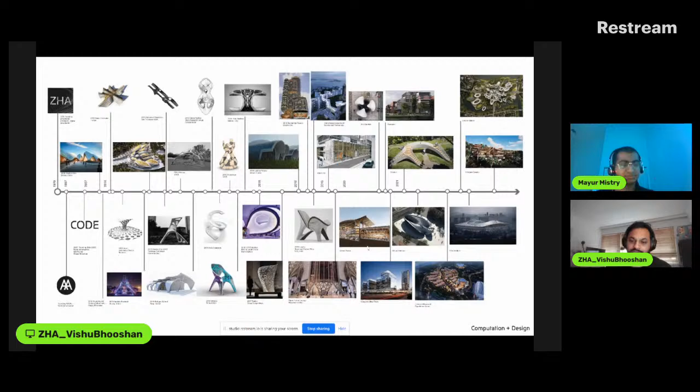Also Patrick brings in quite a few of these interesting pilot projects which kick off our investigations in certain fields, like when we got into high resolution 3D printing with Stratasys. Now Shajay does similar things for the team as well, bringing in these kinds of collaborative projects.

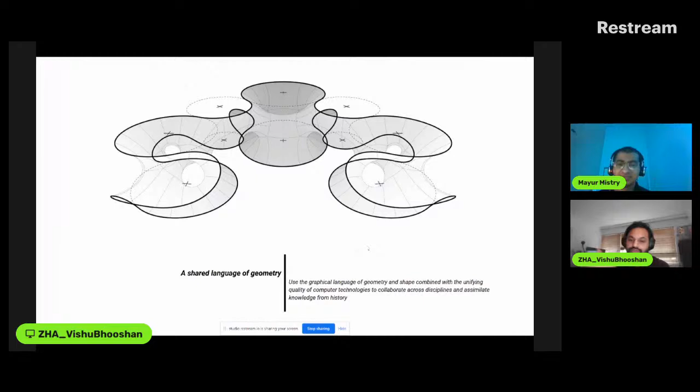Our research, as you might know, is also based on geometry. That's why our libraries are developed on geometries, because they are the shared language, and also a language for collaboration with our collaborators.

Coming to the coding part, most of the members in the team code. We favor first principles to write our own code to understand the algorithms better, and it also helps us integrate it into the design pipeline better because we understand what's happening, what the algorithm is actually doing. This is where we need to look up papers, understand them - if there is no computational equivalent, we understand through papers and try to implement our own.

But now there are a lot of platforms out there which also give you the code, so it's easier to see and implement on top of it or integrate it into our workflows.

As a group, we are interested in coding for design. So all of these tools or stack are meant to augment design intelligence - to aid design, give as much information as possible at an early stage about structure, about fabrication, or any other performance criteria we want to attach.

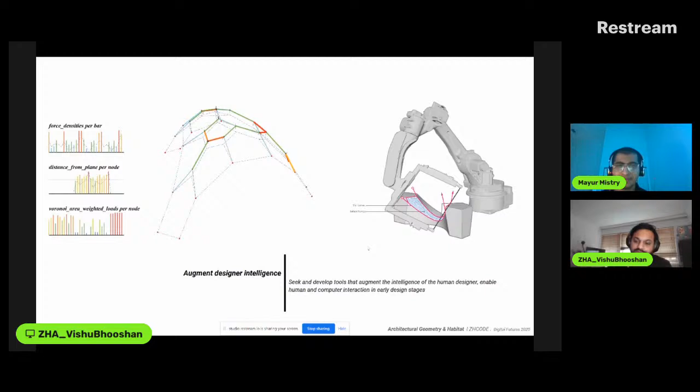As a stack, on one hand we need to develop the core stack, which we currently develop in C++ framework, and then have plugins into all the platforms the office uses - predominantly Autodesk Maya and Rhino. More so now with machine learning, we have to integrate with Python, and then Revit through Rhino Inside. So that's the core stack.

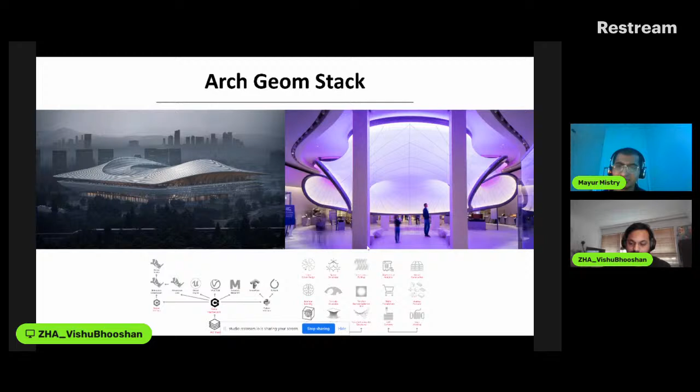We keep trying to update our framework, but the focus of the core stack is split into two aspects - content creation and content delivery - corresponding to the stages of the project. On the left, focusing more on early stage design, and on the right, focusing on later stages where you have detailed design, where you need to rationalize geometry or get in costing.

So we have a role depending on the project. Some projects we are involved at a very early stage, so we need tools there. In some projects we are involved at a very later stage, so then we need tools corresponding to that.

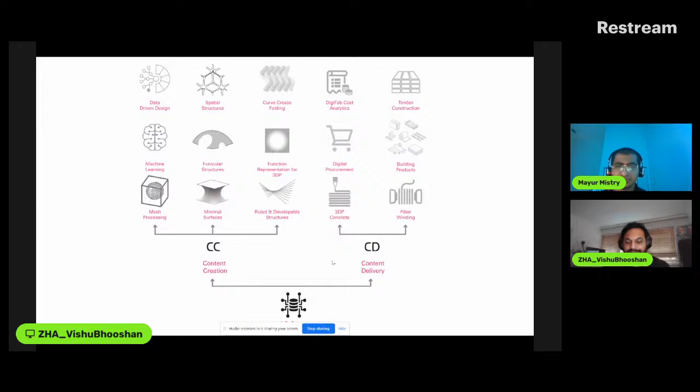Yeah, that's the current kind of stack we have, which is plugging into the different softwares through plugins. It's kind of getting interesting when we are trying to connect to all of these softwares.

As I said, we learn from our contemporaries and from history as well. This is not an exhaustive list, but we look at a lot of computational tech related things at ETH Zurich, looking at the Interactive Geometry Lab there. They have this library called libigl.

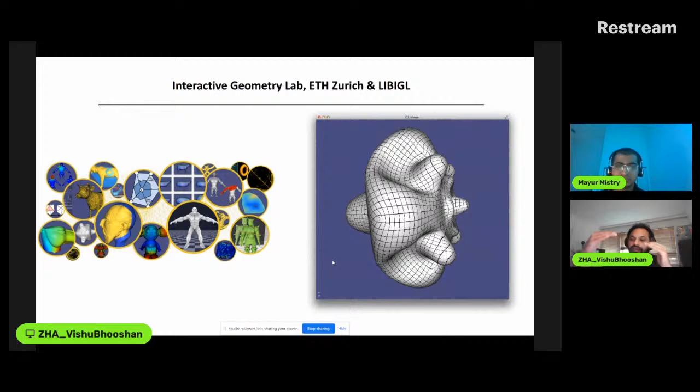libigl is kind of a header-only paradigm, based in C++, and we aligned our framework to be similar in thought process, that it is header-only, so you don't need to build dependencies. That was one of the reasons. They also have a geometrical viewer which is independent of the software, so you can do quick sandbox testing to check if the algorithm works, and once you're happy with it, you can plug it into all the softwares we use.

Also coming to the AEC side, looking at the Block Research Group and their framework called COMPAS, which is based on Python but has a similar idea. They can integrate into different workflows, but they also have a viewer where they do sandbox testing and then develop on top of it.

Other ones we look at are from NVIDIA, called GPU Gems. We look at algorithms there related to geometry processing and occlusion, lighting, and how to use the GPU. This is not an exhaustive list, I just put in a few to get an idea.

On the framework side, this is kind of the current moment. We have a core framework developed inside by a few people at Code, and then an API is developed on top. The core is developed by only a few people so it can accommodate changes, but not many people contribute there. The code developer part is where you need the API—people who know a bit of coding can start using the API to make function calls and create sandbox applications to test the algorithm.

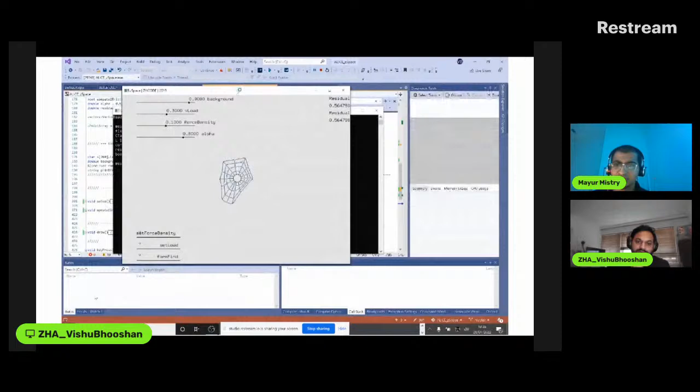Yeah, this is our framework. The documentation is still quite early, so we're still developing that—this is the first version of it. Drawing from the knowledge of all the examples I cited, we developed our own sketch format, a sandbox environment similar to Processing in that sense. You have setup, draw, and update main methods where you call methods from our framework, then press play and check if the code actually works, using a custom viewer based on OpenGL.

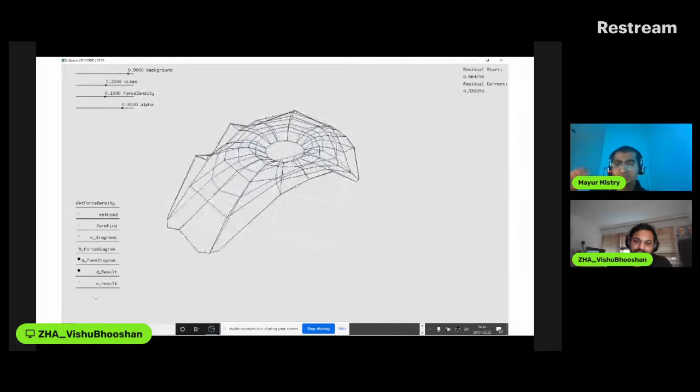Once we're happy with it, it becomes a plugin. This one is currently looking at, I think, some kind of structural systems, looking at form finding using best fit—so given any input geometry, it finds the nearest compression shape. That's the kind of algorithm which is running.

Yeah. That's amazing.

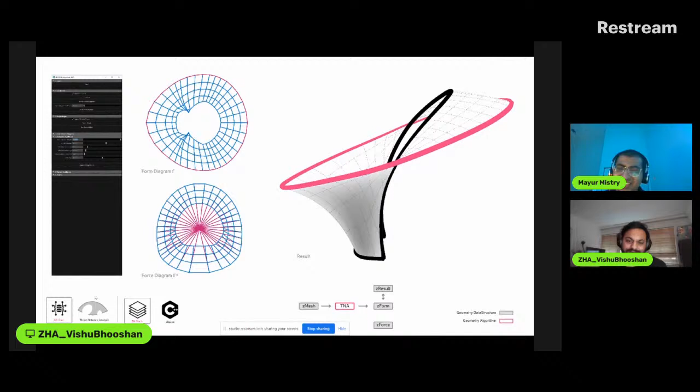There are more things, but if you want to stop and discuss a bit more in detail, we can go over any specific aspect.

I think the tech stack diagram was quite interesting, and the framework you have developed makes a very logical approach based on the different user categories you have in the company, and what's the easiest onboarding experience to integrate these tools for them. That's incredible.

My question is, for example, if someone wants to create a similar framework, what's your piece of advice on how to get started for the intent and goals they have? Sometimes it's challenging to have funding for research at this scale, so how do you take those baby steps to develop something like this?

Yeah, so all of this didn't just happen, it built over a period of time. Initially all of this code was not structured, it was just written. The specific code features or classes were written based on project applications, because we were embedded in projects. So if the project needed form finding, we had to write our form finding tools during that project, and then it becomes part of it.

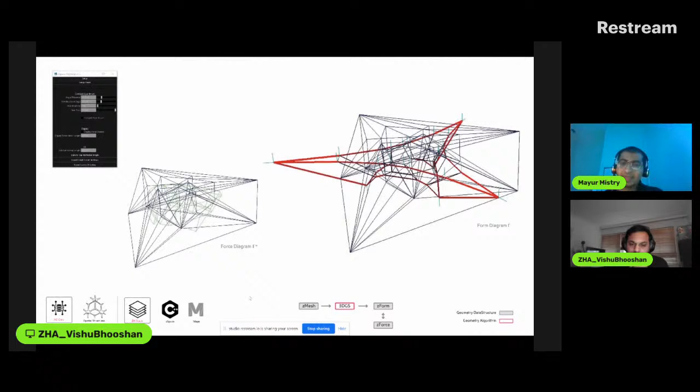Let me see if I can find the correct image. We have an environment and sustainability team developing tools and workflows related to that, and we work with them to develop this. That's why I was also talking about GPU computing—we developed a solar tool, kind of similar to Ladybug, but more real time.

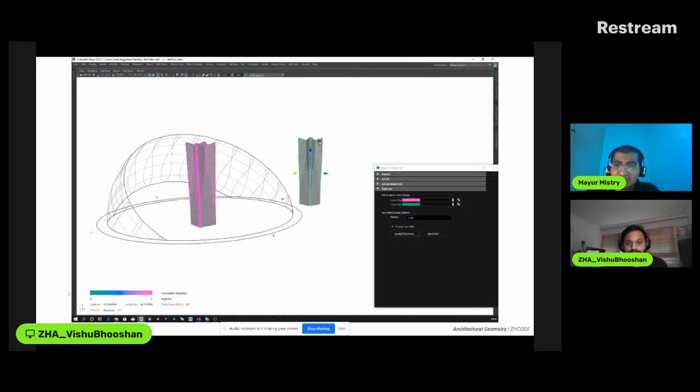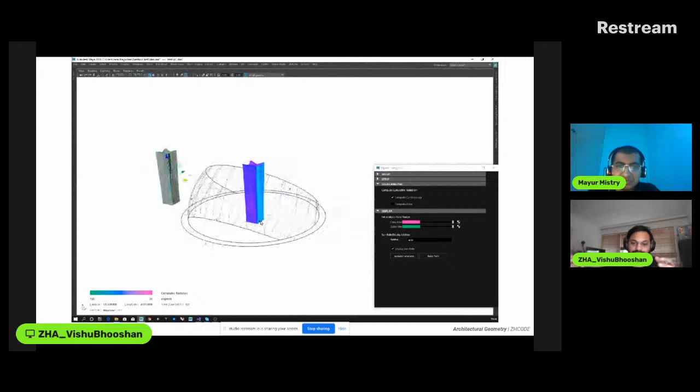It's using GPU to compute while you design—the input design is on the right, and for this kind of solar analysis you need to subdivide it into a lot of faces, otherwise the results aren't accurate. Using GPU you can compute almost 50,000 faces in parallel, so that's why we developed this. It's now in the pipeline, developing the Maya Solar tool.

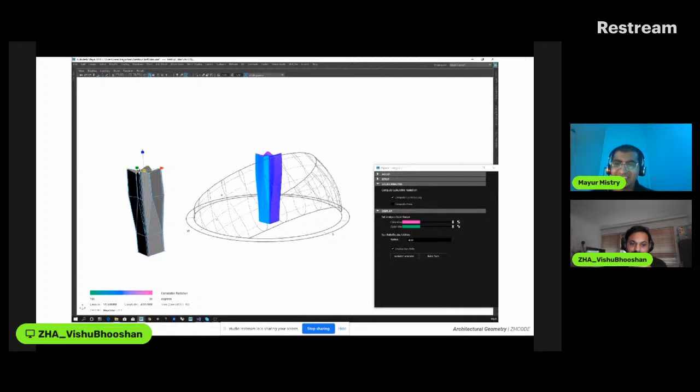It's kind of integrated into the design workflow, so using the interface as you are modeling, you have an understanding of the solar radiation and those analyses almost in real time. So you can see that as you change the geometry, you're getting visual feedback on the right.

This is incredible, I love it. For playfulness during the design phase, the faster inference you get in real time encourages more experimental and explorative work. So this is amazing.

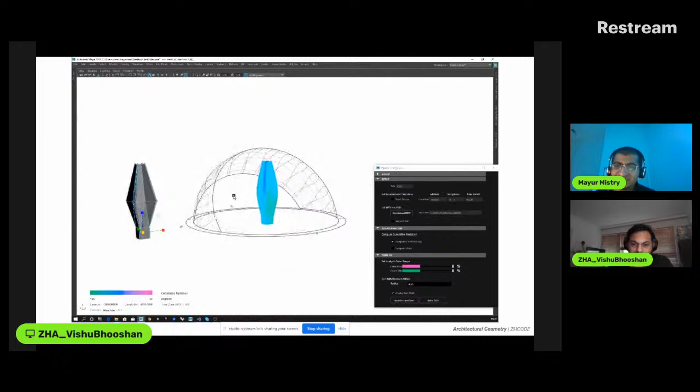Yeah, it's still in early stages of development, but we can already perceive its application. It's speeding up, let's say, one iteration. If you were to just do it through the CPU, 10,000 faces would take at least 1.5 to 2.5 minutes after setup to run the simulation. But in this case, you're almost getting like 12 milliseconds.

So it's real time. If I had to decode this development, currently we are inferencing through a Maya plugin. The core framework people have developed takes an input geometry and talks to the GPU for performance analysis computation, and during that calling there's a formula to take the sun angle and do the compute in parallel. So how did you engineer the GPU part? I think that's quite interesting.

Yeah, the GPU work uses CUDA, NVIDIA CUDA. That's what we use, and that's why I was giving references to the NVIDIA GPU Gems. It's a very good platform to see what people have done, how to use CUDA and GPU for computing, and that's where we learned, or I specifically learned how to code for GPU.

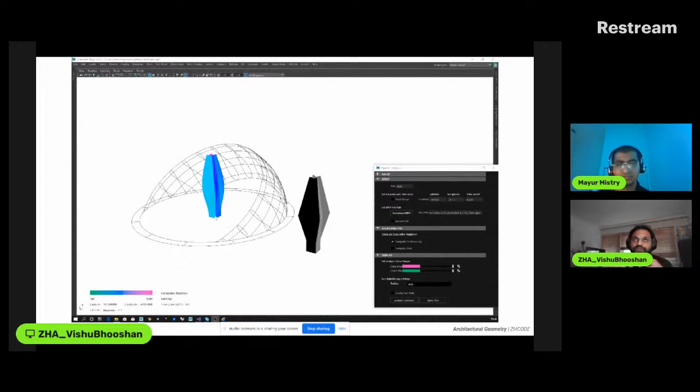So the basic structure is that for each face you are computing, you want to compute the sun angle for each face of the mesh. You have to generate the data such that for each face you have the required sun angle, and you can analyze this for all year long - 365 days, multiplied by, let's say, 8 hours of sun vectors. So that's around, I think, 50 million calculations total, if I remember right, which happens at runtime on the GPU.

So the problem itself is very GPU friendly because you are computing per face of a building or per face of a mesh, which is very GPU friendly. You can parallelize it - you need problems which can be parallelized, and this is one problem which can be.

I see. Just to pick your brain on that - if there are two buildings in parallel and the shadow of the first building is dependent on the sunlight of the other, what if there is a dependency between those two? It's like non-linear, yeah. So that's that one - yes, as you can see now, it's working on an individual one, but...

That is where you can also compute the occlusion in GPU. So the example I gave on the NVIDIA paper was actually that occlusion one - the car was getting occluded. So occlusion is also a GPU problem. You can get real-time occlusion data, so if these are two buildings, the occlusion of this casting a shadow on that is also GPU related. It can be put into the GPU, or it can be split such that you can compute it real time for each face, depending on if it's getting a shadow based on its surrounding.

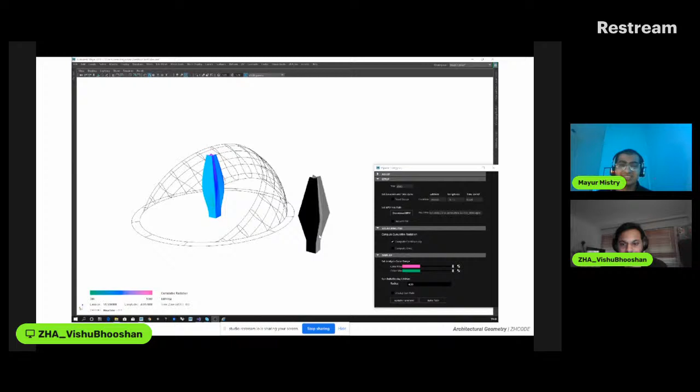Can you walk us through a project life cycle for platform design? I think that's very different—okay, sorry, I think you have the whole presentation, so we can continue for the rest of the presentation.

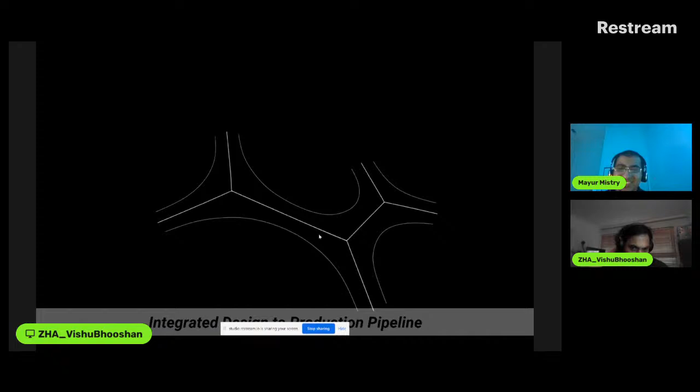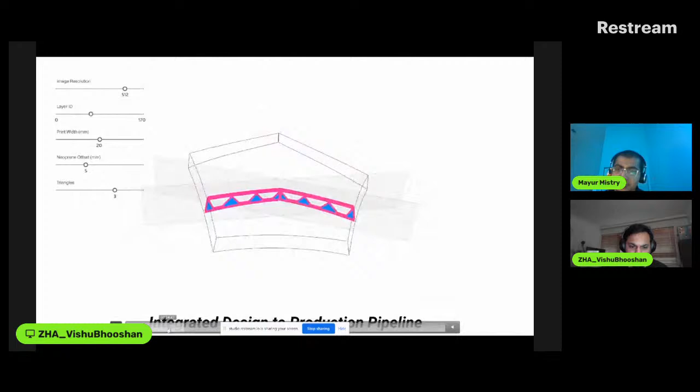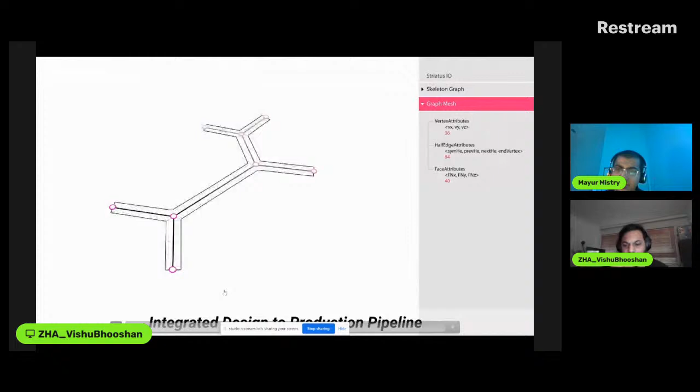So the stack is kind of useful. For any project, as I was saying, there are these kind of pilot projects. Oh, I think I have the wrong video—okay, I think this one. I don't know if I have the correct video here. This kind of integrated pipelines where we're trying to combine things.

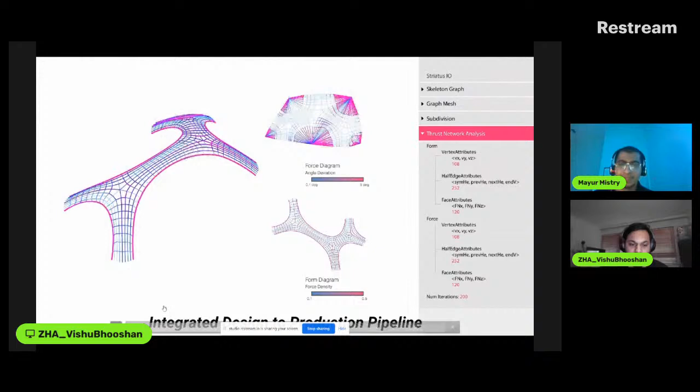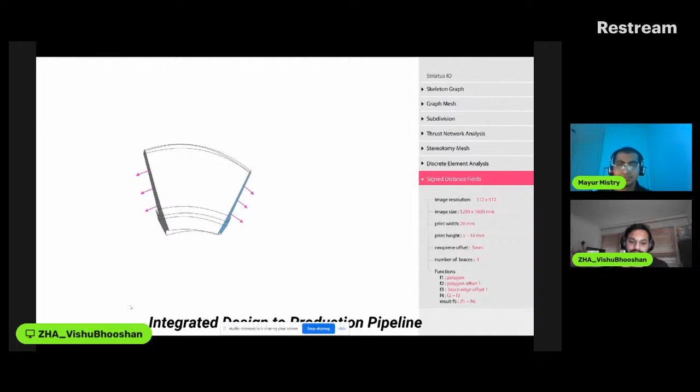This framework allows for collaboration between multiple parties as well. In this case, this was a collaboration with the Block Research Group and Incremental 3D, made possible by Holcim. But the workflow is kind of hybrid here—we were the design team, then it goes into structural analysis with Block Research Group, and then it comes back to us to develop the print paths, then it goes again to the printing aspects. The format here we had to come up with, because all of us have our own frameworks, it was easy to have a custom transfer of geometry, where we had to capture certain attributes.

We had a custom JSON format which sent the right information from the design side to structural analysis. They would do the analysis and send us back a similar JSON, but with added attributes saying this geometry structurally has to be XYZ, and this topology works under rigid body physics or rigid body modeling. Then we use those forces to inform the signed distance field based contouring of the geometry to generate the print paths. Once the print path is done, it sends to the Incremental 3D platform where they read that same JSON now with print information and start printing on their end. Because of these custom platforms, with the whole AEC industry investing in that, it's very easy to add custom attributes, which is very useful when it comes to digital fabrication and digital structural analysis.

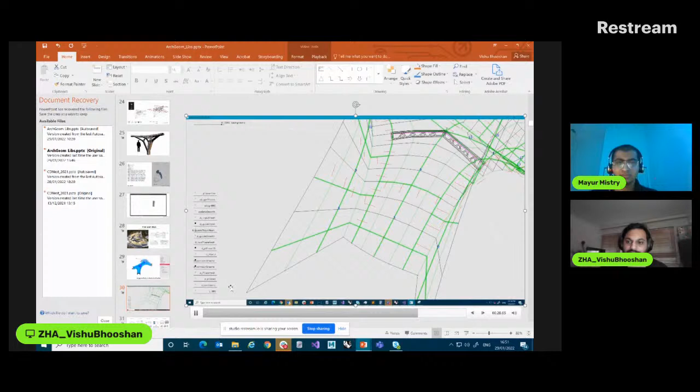At the same time, all of these are initially tested in sandbox environments. This, if the video works, is looking at generating one of the versions of these print paths or print planes for one of the blocks in the Striatus project. Again, this is a sandbox environment where we're testing the code to see if it works. If it works, then it becomes part of the pipeline and goes to Maya or Rhino.

These kind of collaborative projects are where the code generally gets developed. We've done quite a few of these over the last 10, 12 years, and each one gives feedback into structure or fabrication related things—looking at curve crease folding with robots, or printing on a formwork, hot wire cutting. When we work on these, we develop the corresponding tool, which then gets back into the framework.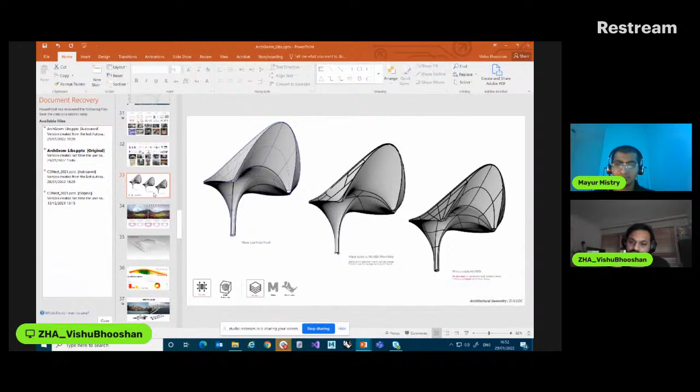Going on to the projects, we also do investigations since we have to work on and deliver projects. In this case, the tools which have been developed can help us rationalize a roof, going from the competition design on the left to the pre-schematic design on the right. It also allows us to negotiate with the structural engineer, saying that because of our experience and tools, there are other topologies which are feasible, and then we negotiate back and forth and settle on a design.

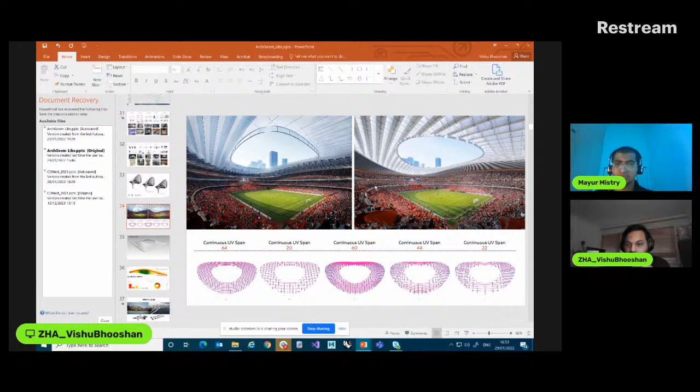You can see there was a truss ring in the middle at the competition stage, which was removed in later stages in collaboration with the engineer.

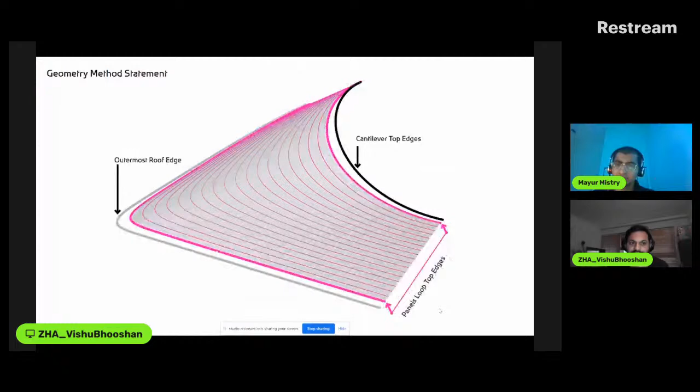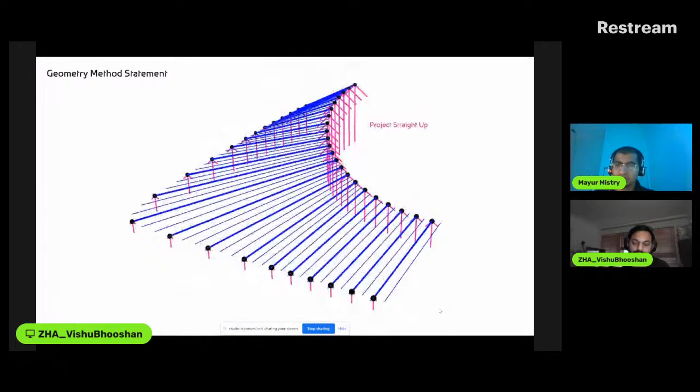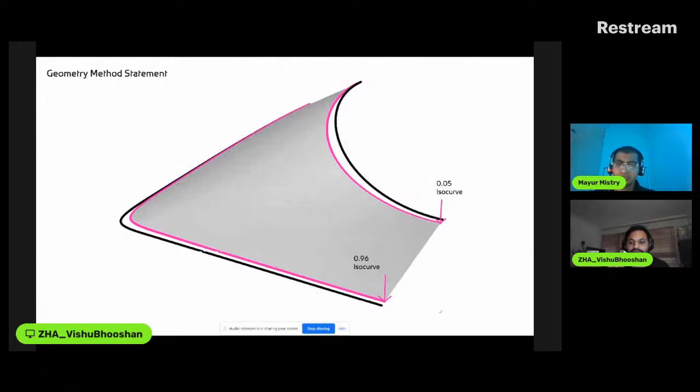At later stages, we have to create a geometric method statement, which I think most companies would also be doing, showing how to create this geometry in a step-by-step manner. Be it roof, facade, or paneling, all these geometries need a step-by-step method so the fabricator can recreate the same geometry without high deviation. So the transfer here is not the actual geometry, but the method of saying how you produce any given geometry.

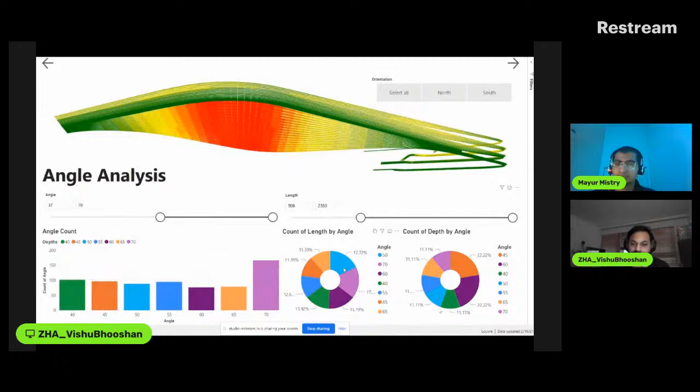We set up tools like this Power BI interface to understand the average length of elements, and whether we can cluster them into bigger or smaller clusters to find an optimum, in collaboration with the fabricator. But this comes at a much later stage, like the DD stage.

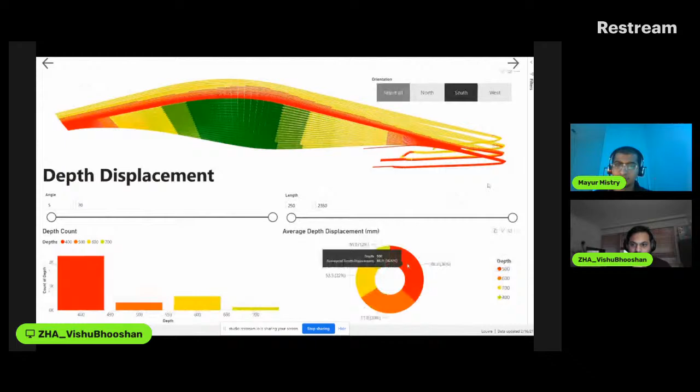I think that's the kind of different tools we use in different stages of the project. Is there anything related to the projects you wanted to discuss specifically?

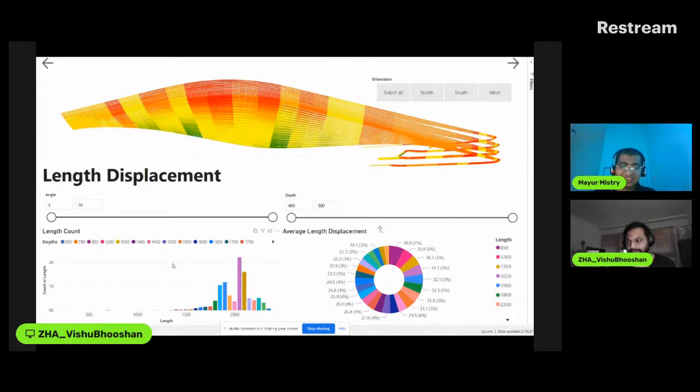No, I think you gave a really good explanation, and I really like the geometry method statement because it gives a very structured approach to the development implementation. Yeah, that's amazing.

It's the same approach. In this case, I just put the roof, but there are similar things for other parts. I don't have it in this one, but you can understand. Let me see if I have it on the other side.

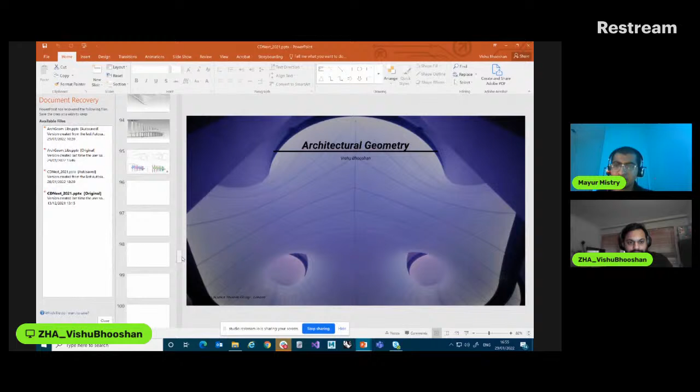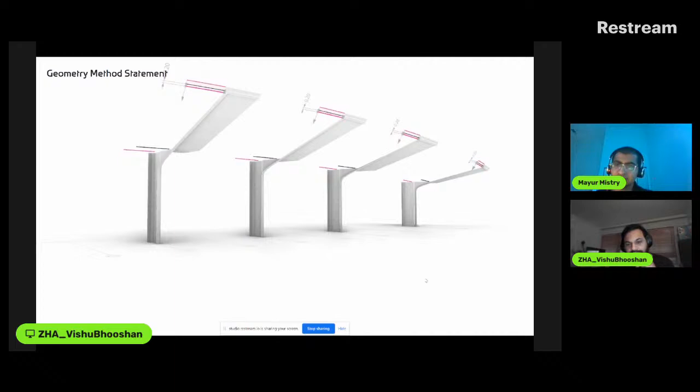So similarly, if we are looking at the paneling of the geometry, again showcasing the different parameters in play to generate this geometry, and then optimizing it for the given paneling strategy.

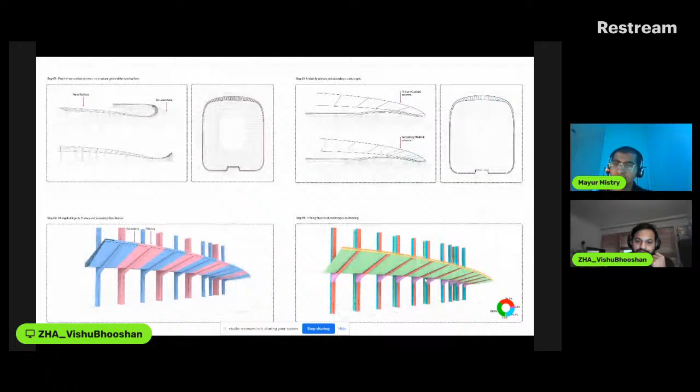This is again looking at terracotta paneling, and this is the corresponding statement given to the fabricator. Similarly for the louvers as well, again optimizing it for certain things and giving the method.

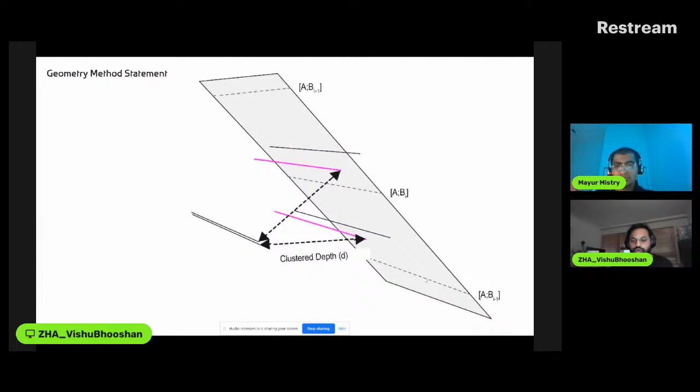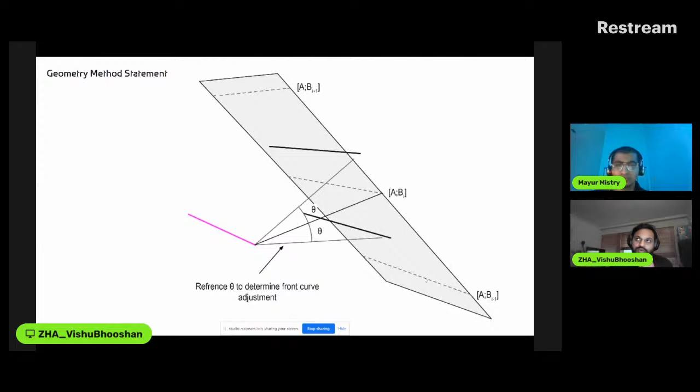In general, sometimes we also transfer the code, so along with the geometry we transfer the code, and they just use the code to recreate it on their end. But if there are legal implications and they don't want the code, then we transfer the method instead.

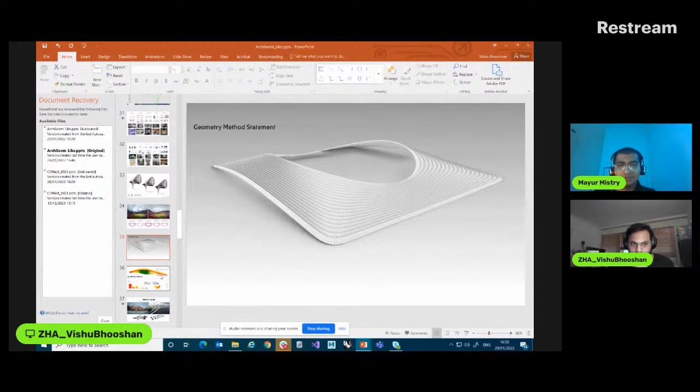I see. And sometimes this could become very complex, where in construction you might need to consider formwork. There are like ten types of formwork, and they're location-based. So what are some assumptions or simplifications you do in this approach?

Generally, when it comes to that stage of the project, we are more supervising, so we are just commenting on what the fabricator or general contractor is proposing. It's interesting because we want to capture this information about how it is going to be built at an early stage.

Let me see if I have the corresponding image. It kind of leads into the platform side, as to how we can proceed.

I don't know, I don't think I have it.

So where we are, kind of also thinking of how when we are designing the geometry, we are already considering these things, like what will be the sequence of assembly. So we can think of optimizing geometry or design such that it is easy to produce them at a later stage. That's something we want to influence our early stage geometrical frameworks with, trying to bring in these aspects about fabrication.

How is it going to be fabricated? How much time is it going to take? If there is feedback about costing already, that would aid design, and that is where the platform is. The next step is to integrate all of these things to bring in the full pipeline.

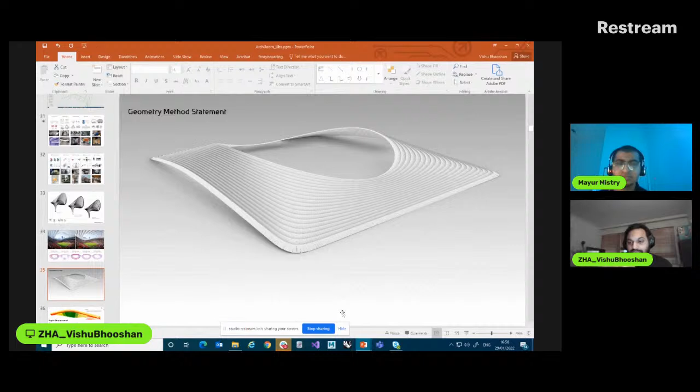Currently, in most of these large scale projects, these kind of formwork related things happen at a later stage where we are just supervising and advising on it, not actually developing tools for that on commercial projects. But on these kind of platform based projects, we are trying to bring that into the platform, so it becomes part of it.

Yeah, and I could already see the value, because if you have this fabrication based thinking in early stage, you would avoid a lot of back and forth and design revisions if later you come up with a form which is not feasible for fabrication - it's a redo. So it's great that you begin it at an early stage.

Yeah, that's exactly it. So we are not surprised or we need to do major revisions at later stages. That's why it's good to start thinking about it very early, so we already have an understanding of it. It also helps in the costing side because the surveyor is able to cost it a bit more accurately because you are giving more information at an early stage.

Awesome. Now, I'm curious to know how you develop the platform design.

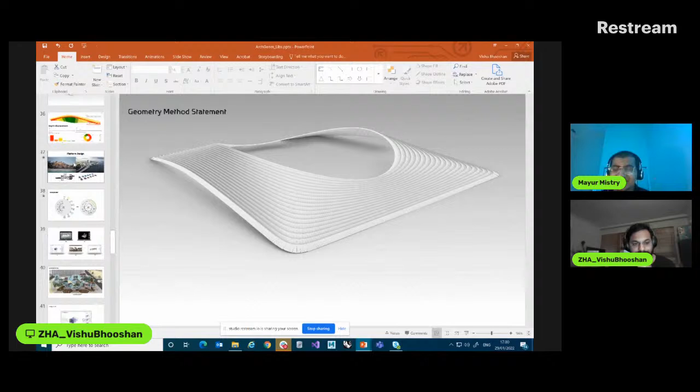The platform path is, currently it's an ongoing pilot project for a residential development in Roatan in Honduras. But similar ideas also lead on to metaverse and those applications as well.

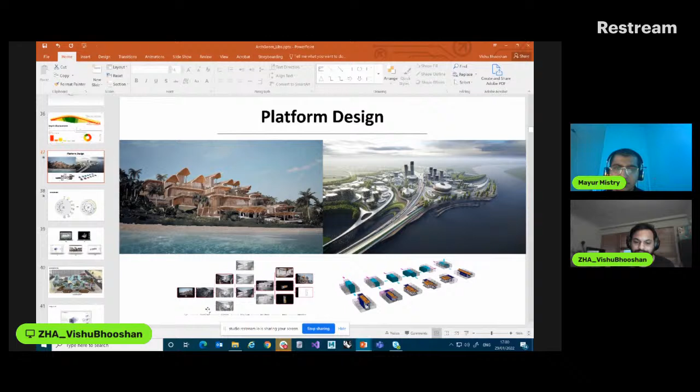On the platform side, it was initially developed for bringing in stakeholder participation, trying to get all the actors into the platform at an early stage. So the first service which was given out was like, currently the user is the end user, so they can come in and configure the units they want and show a video subsequently.

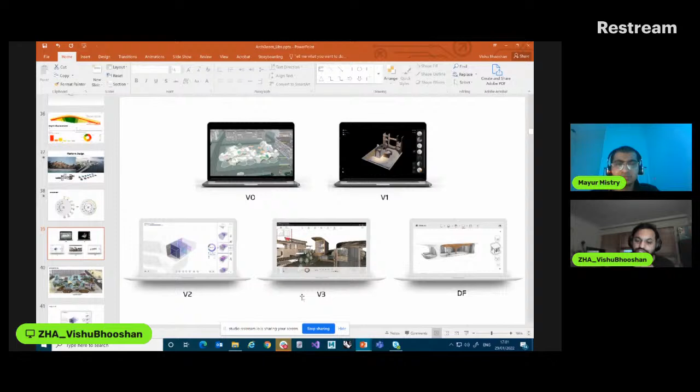But the development also is again similar to coding, it was step by step. So it started off as a research project - version zero was a research project at the Shajay Bhooshan studio at the DRL, and then subsequently the students joined Zaha, and the platform idea was kind of using the base knowledge understood in their thesis project, but then adding other constraints, building up various versions of the platform.

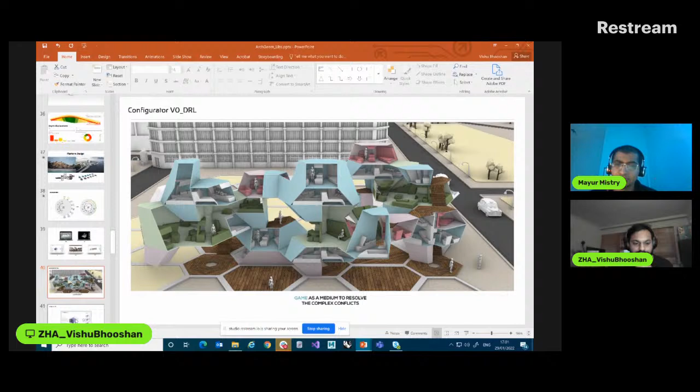So you can see here, the first version was this kind of game interface which was developed at the DRL, again at the Shajay Bhooshan studio. And then once it became part of a project within the office, it's a bit more like storyboarding. So what do we want? This is kind of borrowing from the animation industry.

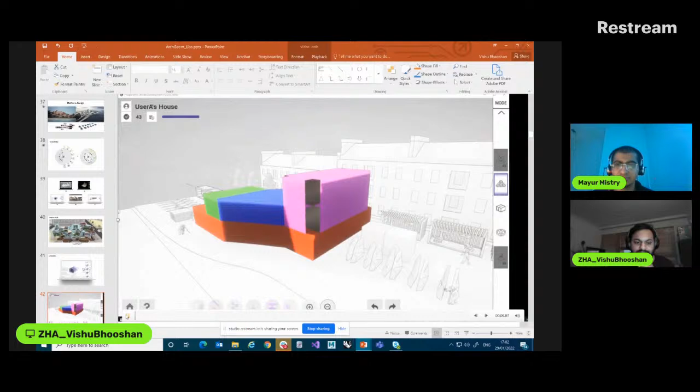You create these kind of keyframes to say what do we want, what should be the features we want, what should be clickable, what are the data we want to represent. So we create these keyframes to understand what the configurator should be. And then once we have that, we implement early stage code to see if it is feasible. So this was a very early version of the configurator in Unreal Engine, purely looking at the UI, so there is a bit of UI design as well, what should be the graphics, etc.

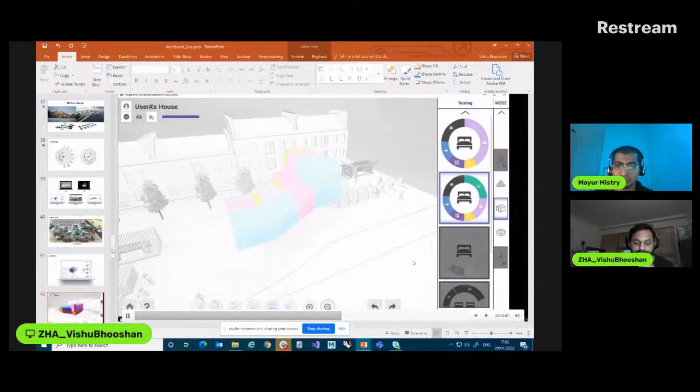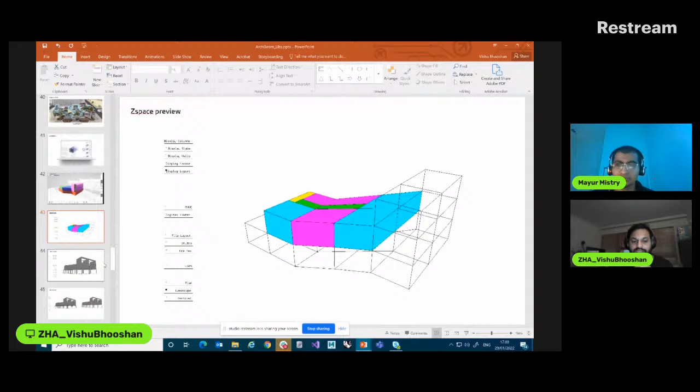But at the same time, another concurrent development is happening in our sandbox environment to see how the geometry should be, like what should be the selectable parts. Can we create the geometry on the fly, so if there are variations we can do that. These are kind of quick tests mimicking the options we want to give in the configurator through buttons in this sandbox environment. So these buttons would eventually become these buttons here when it goes into Unreal.

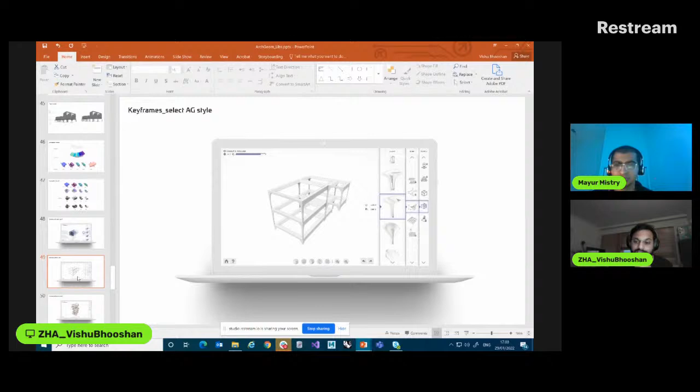So that was the initial thinking, and then not only the unit, but trying to think of how they aggregate the types of units, what customization we want to incorporate. We also wanted it to be showcasing structure, various structural things, and then interior based - if they can change interior layouts, etc. So these were key frames which were made, and then things were starting to get implemented in the game engine.

So then again, sequencing the player actions in the game. You log in, then once you log in, you need to select a unit. Once you have the unit, you need to configure it, and then you set. So these are the different actions the player can take.

And at the back end, trying to develop how to get these geometries onto Unreal. In this case, using a custom JSON format, since the geometries might not be created in Unreal. Some of them could be created in place, so that's the goal, to procedurally generate in place. But some of them you can already create using this kit of parts, modeled or generated in other platforms, then transferred onto Unreal using a custom JSON format, also transferring material.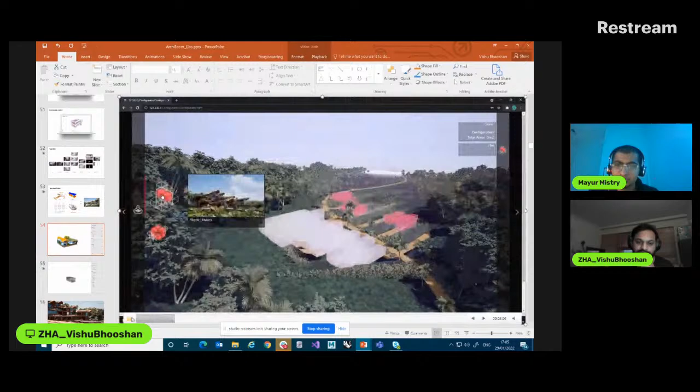So you join, and then the user has a grid. If there was already a user, it would say this plot is being looked into by 3 to 4 people. Once you have it, you can choose the interior layout, and choose where in the master plan you want your unit to be.

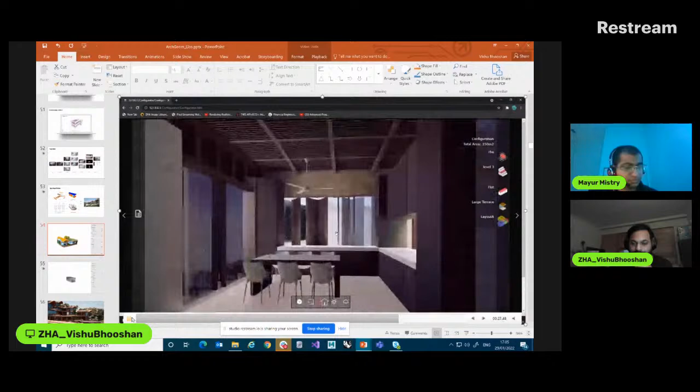Another reason we use the configurator is the visual aspects. This real-time rendering is improving quite a lot every few months, both in Twinmotion and Unreal. That's another reason why we use Unreal and set up the gameplay there.

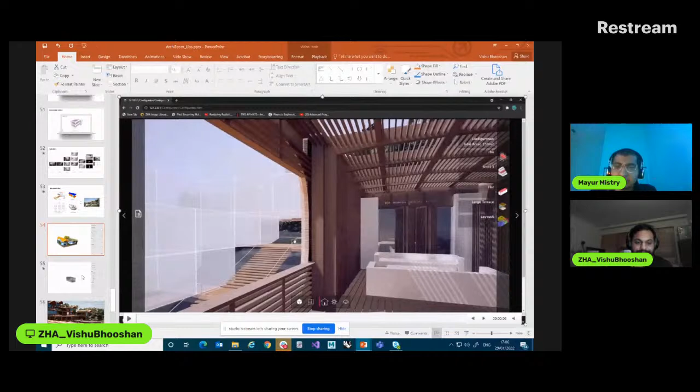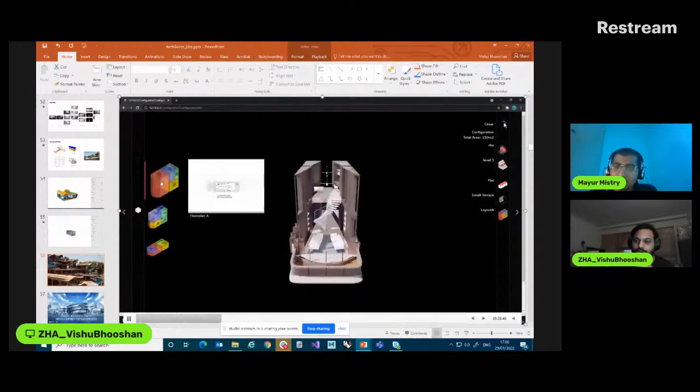So this is looking at the interior options, various interior things, and trying to keep a log of all the actions of the user. Once they're happy, they press submit, and then we get the data of what unit was chosen, and subsequently design the rest of the communal aspects based on the choices made by the end user.

But yeah, yeah, that's the goal. Sorry, I was about to ask, if one can log all the user preferences, that could also generate a really good database of what things at the geometry or design level particular users are attracted to, and what things people don't like.

Yeah, so once the user is happy with it and presses submit, the choices are transferred, it exports data of what the choices of the user were. So we get that data back. It's kind of tracking how many people are interested in a given block.

Because it's like a chessboard, each voxel has a value to it, and there is tracking of how many people are interested in this particular voxel. Eventually you can link that into costing as well. If there is a lot of demand, that voxel will have a bit higher rate because there's a lot of demand for it, but if you go for a voxel with less demand, the costing can be varied. So these are kind of interesting nuances you can bring into the gameplay.

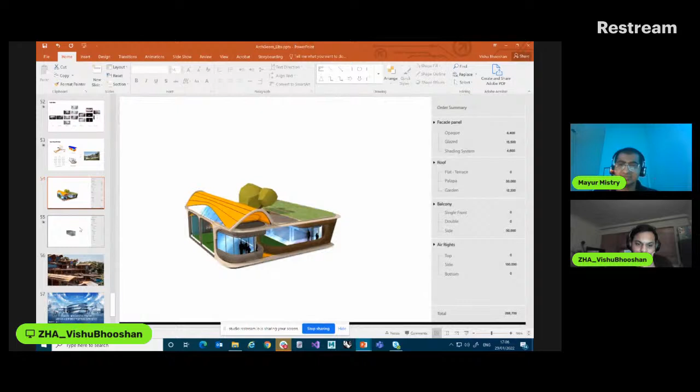Mm, yeah, so for feasible design, if this is the correct video, we had this kit of parts which was developed, and then we set up tools to generate these variations, what are the variations which are possible and which we can be happy with. Then the structural engineer was also on board to analyze which are all in feasible territory that you can customize, so there are eventually five types of units.

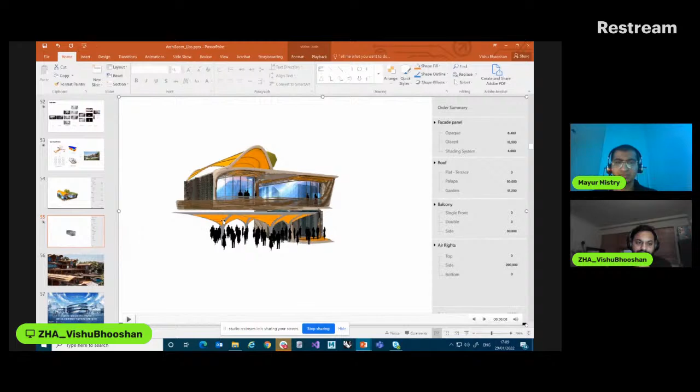And then you can change the roof type, if you want a flat roof or this kind of vaulted roof. You can change the interior, etc. So the main structural elements, there are only 5 to 6 types.

Once we have the choices from the user, that model is again analyzed by the engineers to say whether it's feasible or not. But there's already a rule of thumb, so we want to bring into the configurator the idea that this choice you're making is not structurally feasible, so it would be removed from that part of the gameplay.

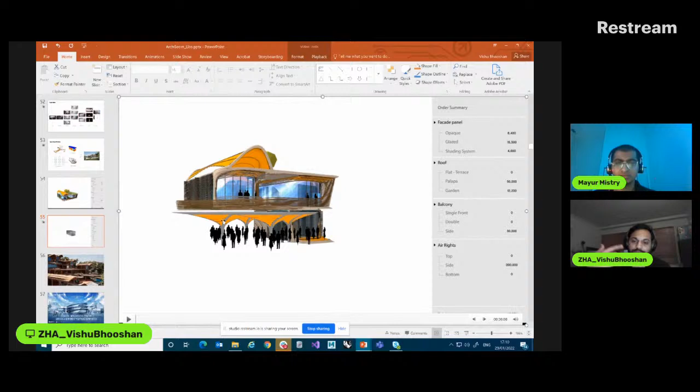So when it becomes multiplayer gameplay, that information would already be there, because let's say a unit at the bottom was chosen. If that unit at the bottom is chosen, you can build on top of it, but you can't cantilever out from it quite a lot. So certain voxels, if the cantilever is really high, those voxels will be switched off, because you're playing based on information of gameplay done by the previous buyer. So a few of the voxels would be hidden.

And if I were to scale this globally, what are the things one needs to customize? Like for example, local building code compliance or egress compliance, things like that.

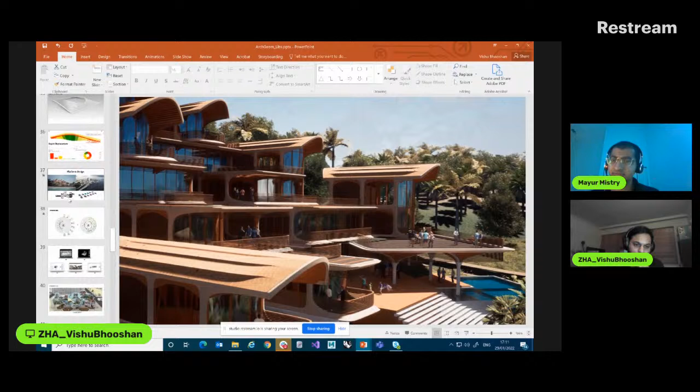One needs to consider all of these actors, which we are showing on the first page. We want to bring all of those into the platform as well. So there are planners who come in with their regulations, and that becomes part of the framework. Now we looked at the end user bit, and then we developed parts of it for the developer to create strategies for.

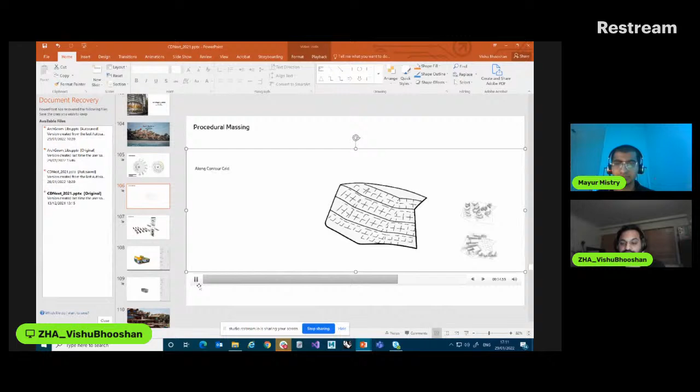Let me see if I have the one. I think it's this one. So here it's looking kind of like a massing model for the developer, showing how many units are feasible. This comes at a very early stage in the platform. It's not configuring, but looking at generating, given the number of units, which option has the best views, which performs best in solar gain, etc.

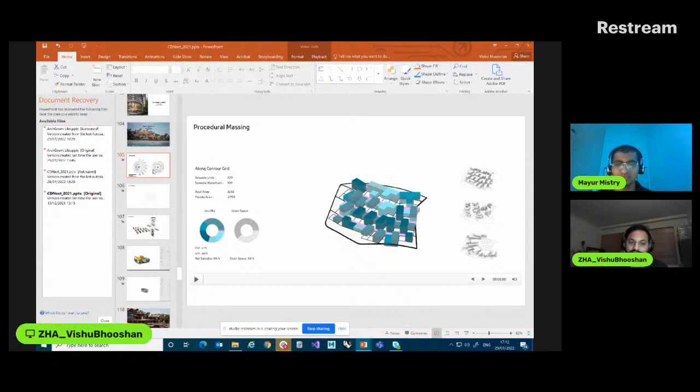So you create a metrics. This is also part of the platform, and similarly the circulation aspects and navigation planning. These things in this particular project were happening concurrently as we were developing the platform, but the goal is to have them part of the framework, so you're making a much more informed choice for each of these actors having some specific things in the platform, and this also includes the fabricator, the contractor, etc.

I could foresee this becoming its own metaverse. If there are various parts of land, people building their homes, it's kind of a Minecrafty way of giving people the freedom and their own metaverse.

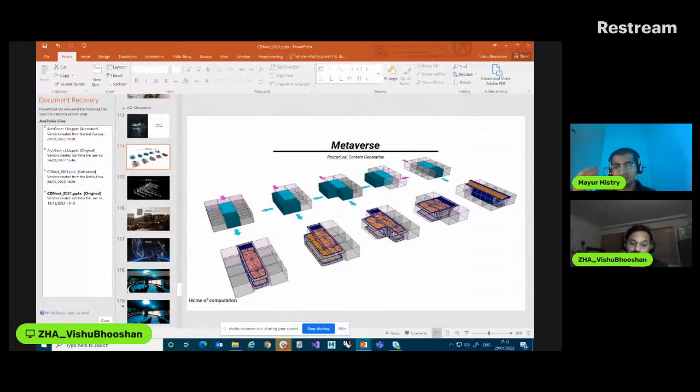Yeah, that's the reason why we are interested in the metaverse as well, because it's like a natural step for the configurator, since the metaverse is kind of like a home for computation. It builds on procedural generation of content, so you can make these variations, get customer feedback or user interaction, and user content customization. These are features already part of the metaverse, and on top of it you get really high fidelity images. That's why we are investing in that.

One of the early projects is this kind of urban incubator of economies. It first simulates the economy digitally, and then actually builds it in the physical world. It's similar to Decentraland in that sense, that there is a digital version, but if you invest in the digital one, you are also investing in the physical aspect of Liberland. That's something we are currently developing, as a next step for the configurator.

And what do you think are the skill sets architects need to develop to become more at par with game designers or 3D artists, to compete in the metaverse? For the platform design, you mentioned UI/UX was part of it, like storyboarding. So what are the non-architectural things one should be learning or preparing?

Yeah, that's important, this kind of storyboarding and creating keyframes is very important. And then there's a lot of the gameplay itself, like how to set up a gameplay, whether it's one-person or multi-person gameplay. There are set templates which you can look into, both in Unreal or Unity, to understand how these gameplays can be set up.

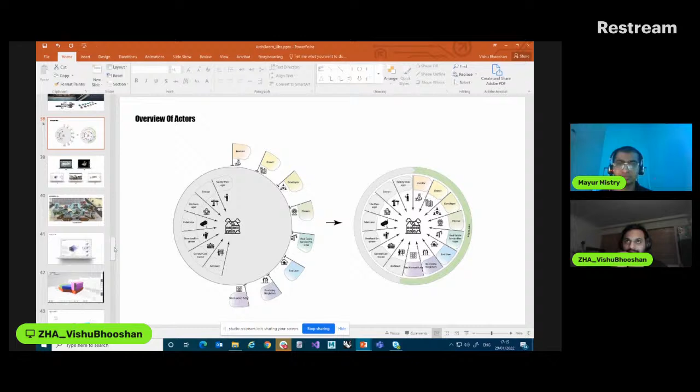It's like one is the design of the user interface, but the second is actually setting up, knowing the technical know-hows of how to make these buttons. So these things you also need to develop code for. But these things are now kind of easily available in Unreal now, so to create it again would be much faster because things are available. There's like a HUD plugin or something which does similar things.

There is a difference like in traditional design where we have a developer and client, and it depends on participatory design. Here when we are developing UI UX, it's a whole spectrum of users, which could be from young people to old people and with different backgrounds. So while developing UI UX, was there any case study or user interviews which helped in this creation?

Yeah, so there was a pilot group with whom this was tested and we were trying to get feedback from them. Before the configurator was made available, there was a focus group who was looking at it and giving feedback of okay, this is working, this is not working. So they were kind of early testers to get that feedback.